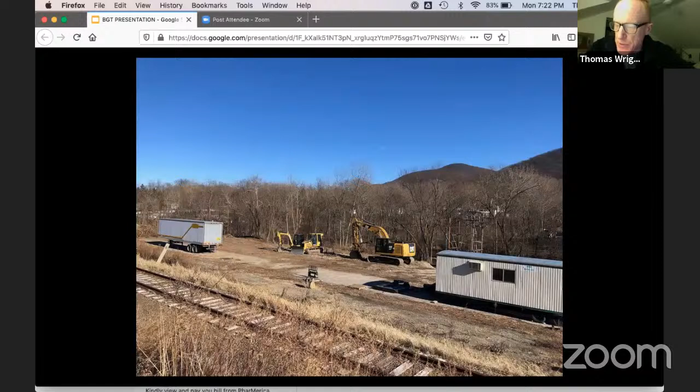This is an exciting time for trails in Beacon. As people flock to the Hudson Valley, more and more of them are discovering that Beacon's walkability extends to a large and increasingly interconnected network of trails - trails that expand our awareness of the natural beauty that surrounds us and connects us to communities around us. We are closer than ever to reap the rewards of planning and work that began over a decade ago, when we conceived of a continuous trail along the banks of Fishkill Creek from the train station to the Fishkill Town Line.

As an example, 2 key segments of the Fishkill Creek Greenway and Heritage Trail will soon emerge as part of the development underway at 248 Tioronda Avenue, and just across Wolcott Avenue at 2328 Creek Drive, the former DPW yard. In the action plan that the committee presented to the council in June 2020, we outlined the remaining challenges for the trail, as well as several other trail-related initiatives that we feel will greatly enhance the walking and hiking experience for Beacon citizens and its visitors.

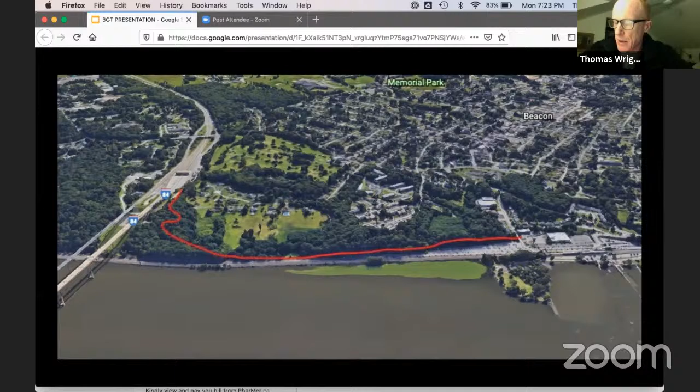One of these initiatives is the Beacon Hudson River Trail. For those of you who aren't familiar with it, the BHRT is a proposed trail that will one day link the pedestrian path of the Newburgh Beacon Bridge with the MTA Beacon train station. In addition to the practical benefits of a walking and biking link between Newburgh and Beacon, the trail passes through a very scenic wooded area and affords dramatic views of the river and the bridge overhead.

In 2014, the Beacon Greenway Trail Committee helped secure matching grant funds from the Hudson River Valley Greenway Conservancy to fund a master planning process led by Dan Biggs of Weston and Sampson, with insight and review from committee members.

That plan was presented to the City Council in March of 2017. In December of 2017, the city again successfully applied for a grant through the Conservancy to prepare preliminary design plans for a pathway and related structures for the trail. It is the result of these efforts that I'm presenting this evening.

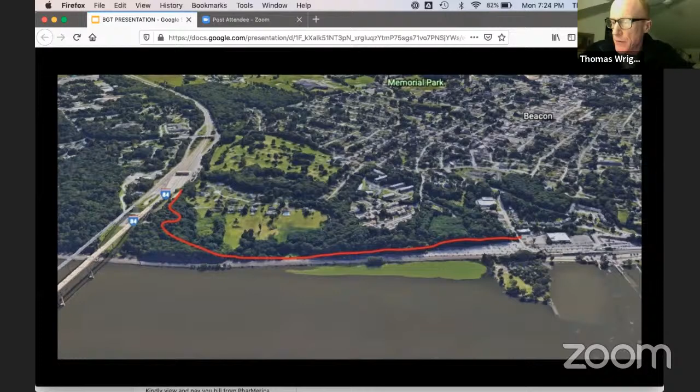The plan drawings and design report provide siting and layout for the trail as it winds its way down from the elevation of the bridge path to a scenic bluff overlooking the river, along the MTA rail line, to emerge at West Main Street, just a few steps from the Beacon train station.

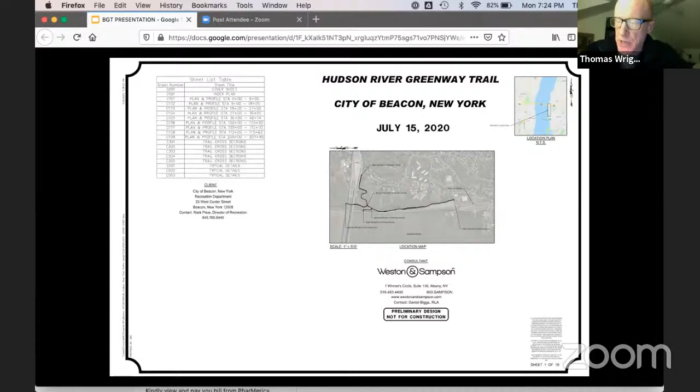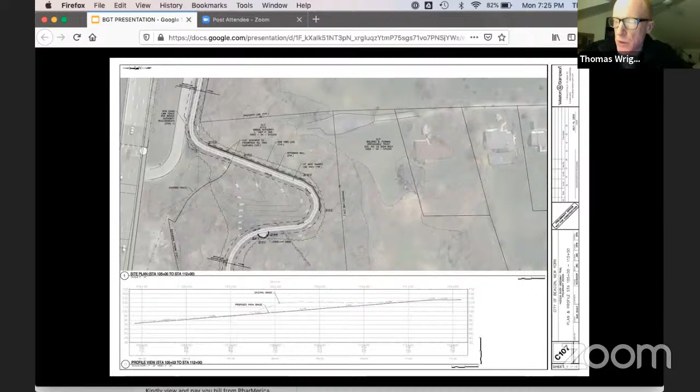Key aspects of the design are as follows. One, switchbacks and retaining walls required to navigate the drop in topography between the bridge and the bluff just above the rail line. Two, a future connection to residential communities in the town of Fishkill on the other side of the bridge. Permissions, cameras, and security fencing are required by the Bridge Authority, which are outlined in detail in the report.

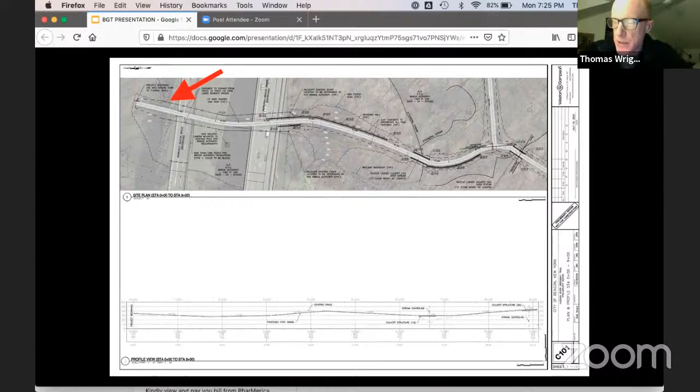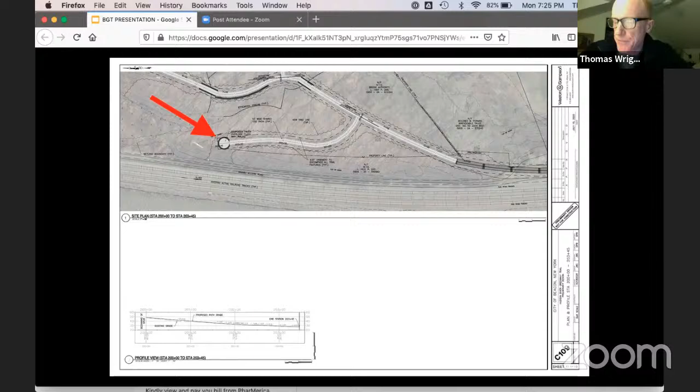Three, a viewing plaza at the bluff will provide a unique view of the Hudson bracketed by the dramatic bridge structure above. Four, an elevated portion of the trail, which navigates the rapid change in topography between the bluff and the MTA rail line.

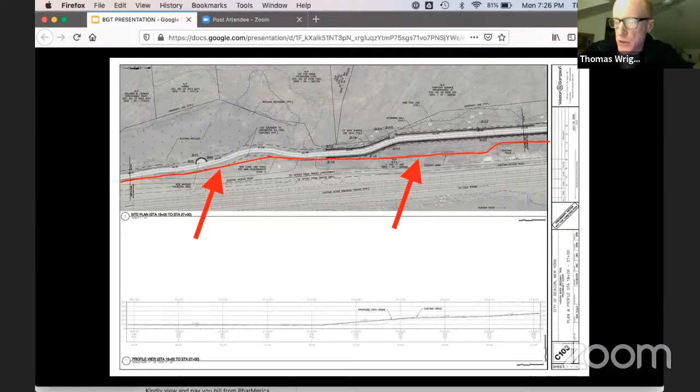Five, fencing locations and specifications as required by the MTA to keep trail users from Metro North train service. The design report and plans describe the proposed trail in a way that makes the project real. It analyzes the site, describes the challenges, and proposes solutions to these challenges. It provides enough information to generate a preliminary budget study, which Mr. Biggs has provided. The committee has reviewed and approved the final draft of the design report, which is available through the link in this evening's agenda, and we encourage the council to provide its approval as well.

In the spirit of keeping the momentum going, applying for another Greenway grant is a logical next step, and the committee encourages this. The design report notes on page 18 that, quote, upon approval of the preliminary design documents, the construction documents, including contract drawings and specifications, shall be prepared for bidding, end quote. However, given the costs and time frame associated with a project of this scale, the committee would like to propose a phased yet parallel effort.

Page 17 of the design report states, quote, as a first phase, it would be beneficial to establish an informal soft surface trail alignment, set up access easements and agreements with property owners, and therefore enable access for interested trail users, end quote. The committee feels that this initial phase can begin immediately, even as grant funds are sought for final construction documents.

An initial phase would focus on the portion of the trail between the pedestrian path at the bridge and the viewing plaza at the bluff along the rail line. This would leave the portion of the trail along the rail line inaccessible and off limits for the time being.

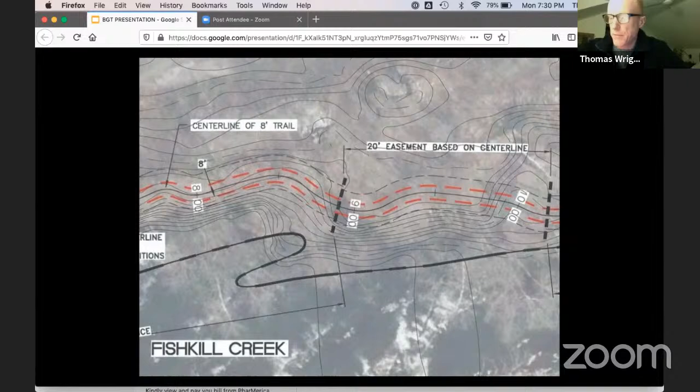The committee traced the desired route for the trail. Lanc & Tully used this as a template to place the 8-foot wide trail and 20-foot wide trail easement over the topo maps, and in the process also generated elevation diagrams that describe how much the trail rises and falls over a given distance.

In the north parcel, the trail is placed close to the top of the creek bank and extends from the trail currently under construction at 248 Tioronda to the Scenic Hudson parcel directly above Sucker Falls. The Scenic Hudson parcel separates north and south parcels of the Sisters property.

In it, we have proposed a fork allowing future trail users a choice between an ADA accessible route and a non-accessible route, which navigates the steep slope between the falls and the North Sisters parcel. The non-accessible route crosses over the old mill race and connects with the current northern terminus of Madam Brett Park, the viewing platform below the falls.

The accessible portion of the trail stays at the higher elevation and works its way across the MTA-owned parcel before switching back and joining Madam Brett Trail just north of the parking lot.

Hey Tom, back up one. I'm sorry? Back up one slide. I just want to be sure what everyone's seeing.

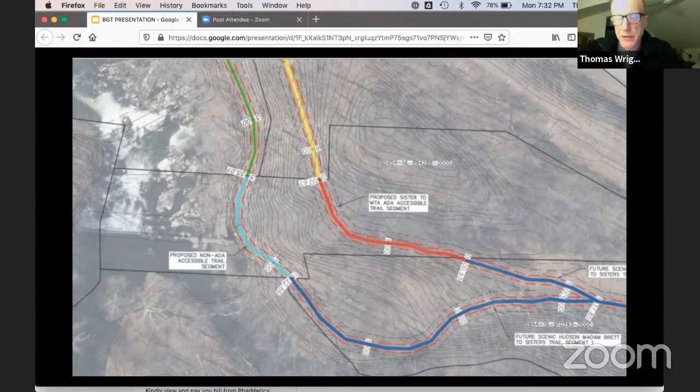The green is existing trail, and it goes on the blue line to the platform at Suckers Falls. That's the one on the left. And then you're saying that would continue near the creek and come around the bend. So currently the light blue—yep, the light blue is the area along the mill race as it goes alongside that dam. And the end of the green is basically the end of the viewing platform. And across the light blue, when it gets into dark blue, that's Scenic Hudson property. And that property links the light blue area of the southern parcel of the Sisters property to the northern parcel.

Okay, here's the northern parcel, which is the link between 248 Tioronda on the right and the Scenic Hudson property on the left.

A more detailed survey and design study would be required to determine the exact route for the accessible portion of the trail to ensure that it meets ADA standards.

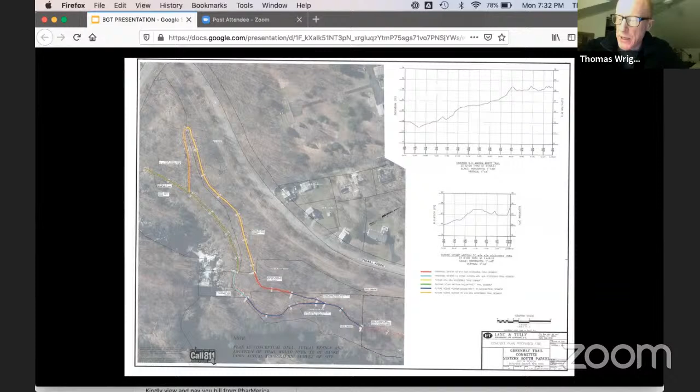Like the BHRT design report, the Sisters concept plan takes the ideas in the master plan and makes them real. Assuming the property is developed, the concept plan can be used as a guide for the developer in placing both trail and easement. The committee would encourage the council to approve the Sisters concept plan, but also to support a phased strategy similar to what we are proposing for the BHRT.

That is, approval for moving forward with securing easements through these parcels. This would allow for the implementation of an informal trail with the all-important public access for the trail. Further, with your approval, we propose to use the same strategy for the remaining segments of the Fishkill Creek Greenway and Heritage Trail. With your support, we would like to begin work on these segments immediately.

I would like to conclude by pointing out that the committee has achieved a lot for the city's trail network by taking the long view. The strategy of phased realization of trail access that I've outlined this evening is a way to expedite the process for both the BHRT and the Fishkill Creek Greenway and Heritage Trail. The committee requests that you consider this strategy and hopefully give it your blessing. Thank you very much, and I look forward to any questions that you might have.

Thomas, when you talk about the informal trails through the Sisters property, how does that get funded? Is it just like a goat path temporarily, or who pays for it, who maintains it?

Well, it could be, I mentioned, possibly using volunteer efforts. There are some organizations—Amy Kacala from our committee, who's the project manager for the Fjord Trail, is familiar with some organizations that go through and do just that. They establish informal sort of, kind of glorified goat paths.

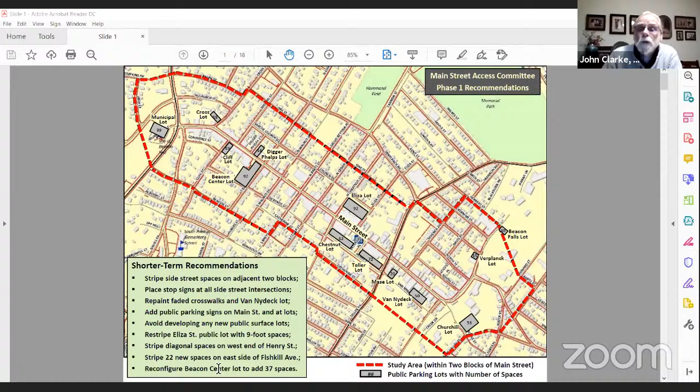So let's show some of those ideas. Here are the concepts for the public parking lot. There's sort of 2 sets, or 3 sets.

One is wayfinding signs, like this one up here on the left corner, that would be along Main Street at the intersection to get you to a public lot.

We proposed to name the lots, all the lots, primarily by the intersecting street. So you go up to Churchill Street and take a right, you'll get to the Churchill lot. That way, in theory, your GPS - if you remember the Churchill lot - and even we assume after a while, Google Maps and places like that will be able to direct you to those lots because they will have a name attached to them.

The second set of lot signs are at the lot entrance itself. They'll recognize it as a public parking lot, give you a name, and note any special postings about times or prohibitions or whatever.

And here's a whole bunch of examples. These are going to have to be determined based on each individual lot, but it gives you a nice, clean, recognizable public parking lot signage system.

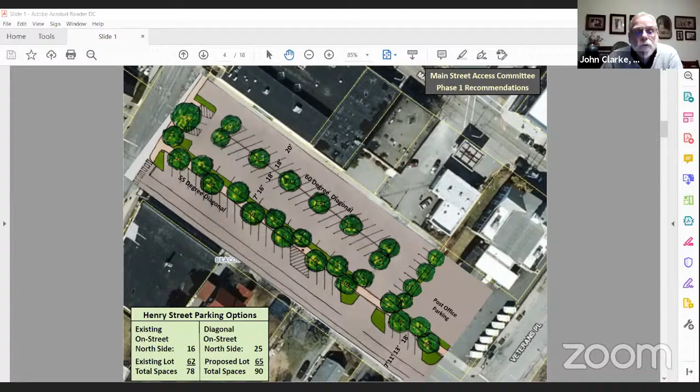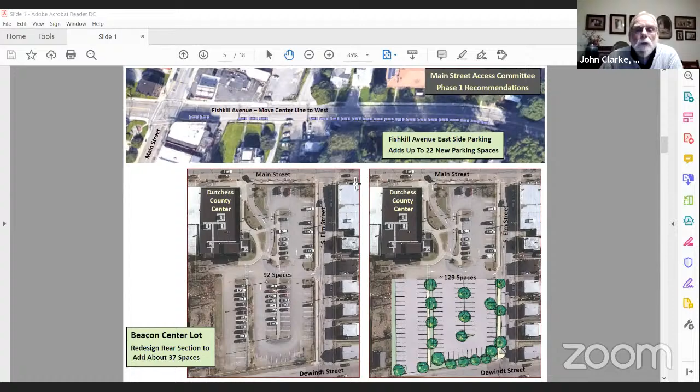On Fishkill Avenue, here shows 22 spaces up to where the curve starts. Because there's hardly any driveways along here, it's very efficient for getting cars parked along that street. All you have to do is move the center line and stripe the spaces, and get DOT to agree to it, which may be the hardest thing. The same thing on the west end of Main Street. Route 9D, which is another state highway, is really inefficient.

This is a sketch I did back in 2007 for this street. Just by changing the lane widths to something respectable, not oversized, you can get parking along the side next to West End Lofts, and you can get 25 spaces just on the first block. You could go another block if you wanted to. In addition, instead of having these two-way left turn lanes, which is just more asphalt, I'm proposing putting in street trees down the middle on a planted median, so you actually have something that looks like a boulevard at the entrance to your city rather than an arterial.

It's worth noting that new development is already completely overfull in the parking lots behind them. So that part of town is going to be short of parking, per unit, and they provided exactly that, so there's not a lot of visitor parking around there.

The city is also in the process, I understand, of acquiring this lot, which would be another 70 or so spaces if it was striped out to maximize the space there. So there's lots of opportunity to get spaces without doing a lot of work in the first phase.

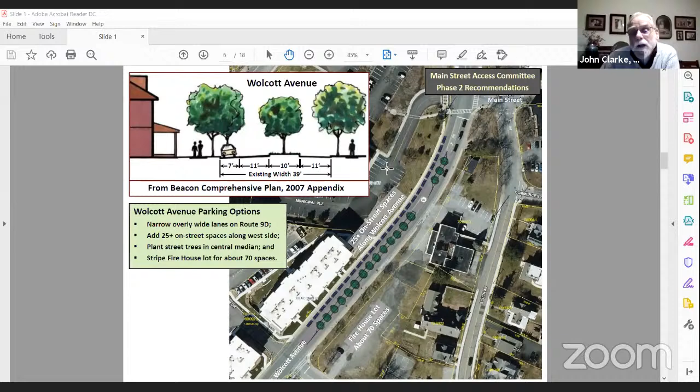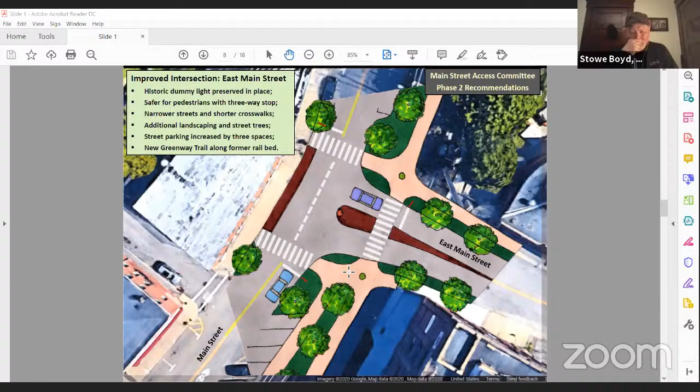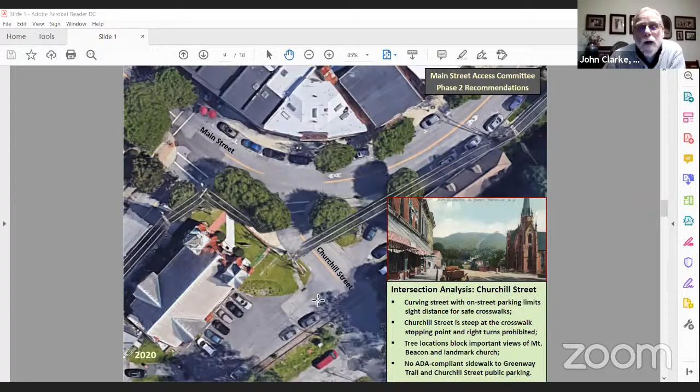I think it's safe to say this is the worst intersection in town right now. For example, at this part where you walk up the hill, there's a swale you have to walk through. It's not a sidewalk, it's not even a dirt path - it's this concave swale that on a rainy day is literally channeling water.

So it's ghastly. I'm going to suggest we stop with the short term, since you've about finished the near term - that's actually a decent stopping point. Consider that part one, okay? When you're done, we'll take questions, and then we'll pick up part two next time. Sure, okay.

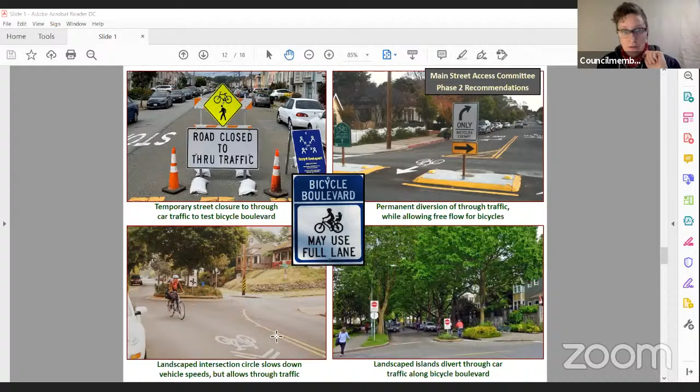Got a couple comments and questions, I'll try to be quick. Overall, fantastic, love it, love it, love it. On the Churchill Street intersection, John, would you mind pulling up the image? Yes, perfect.

The other thing is widening the sidewalks has a natural tendency to slow drivers down, even though they have exactly the same amount of surface street. They drive slower when the bump-outs are confronting them. It's both the slowness and the visibility. They just can't see what's coming around that corner, they wouldn't know there's a car pulled out at a weird angle, stopped as they're trying to badly park. So that would still be my encouragement, even with what you shared.

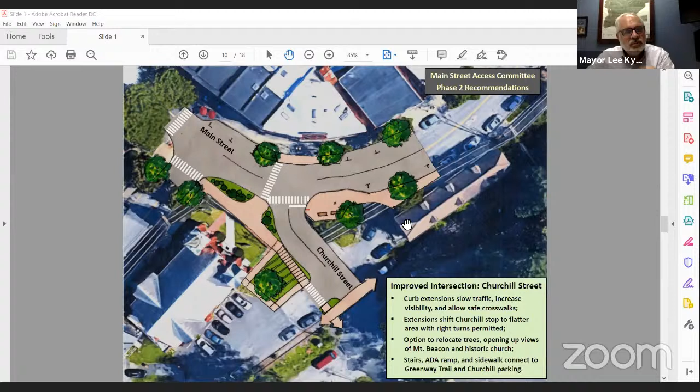So thank you, and again, I apologize for having to push people along, but this one will break into parts. The second phase will go through the rest of the document, take all our questions on the first phase including the bike lanes, and we'll figure out next steps. I'm thoroughly excited by this. There's a lot of stuff in tonight's agenda I'm very excited by, and this is certainly great work. I want to thank Sarah and John and the entire team.

There are a lot of things you can do that don't cost a lot of money that would make a big difference, like parking signs, striping, stop signs—those aren't major expenses. So thank you all. See you in a couple of weeks. All right, apologize, but that's how it works.

We've got 5 more items to go, and then personnel, and 2 items in executive session.

Traffic safety, can I just get Nick to give an overview of what the law says in terms of traffic safety? That can open up the discussion. I don't know if we'll finish that, but let's just start there.

Fair enough, Mayor. Section 65 of the city code references the creation of the Traffic Safety Committee. 65-2 talks about its composition, and 65-3 talks about the powers and duties.

We also have to look at other sections of the city code, specifically section 211-2, authority to install traffic control devices and the adoption of regulations, which empowers the city Traffic Safety Committee to make recommendations, and their approval is required before the city council can then adopt a local law controlling and putting in a new stop sign, for example, or a yield sign or something of that nature.

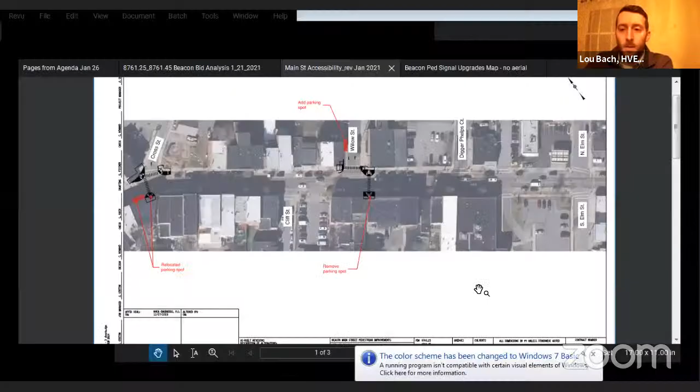So would someone like us to go through those, what the actual scope is? Real quick? Yes, please. Okay, I'm going to share my screen. All right, is that up? Everybody can see that? Yep.

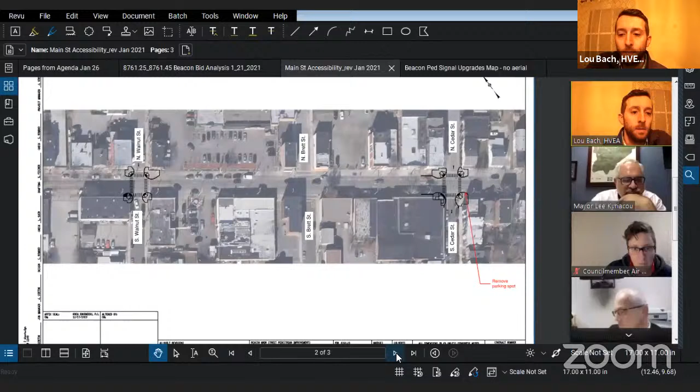All right, great. So as Mia said, we prioritized the intersections. Starting at Cross Street, moving up to Willow. Next page here, we included Walnut Street, Cedar Street. Chestnut Street is highlighted here because that's actually included in the other project, the pedestrian signals project. Then moving on to Eliza Street, and then at Veterans Place.

These intersections would include new curb, new ADA ramps, drainage improvements if needed, and crosswalks. I can go through each one if anybody has questions at a particular intersection — I can go into more detail if needed.

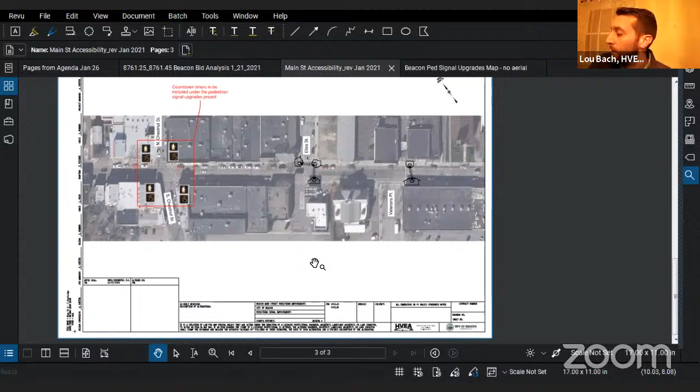Can you just remind us what the amount of the federal grant is? So doing that number of intersections is going to cost the federal government how much money? This is going to be including the pedestrian signals as well, because it's a full signal too. For the Main Street project, the total amount funded for construction was $799,000, and that's 80% covered by the federal government. So that breaks down to 639 from the feds and 160 from the city to cover their match.

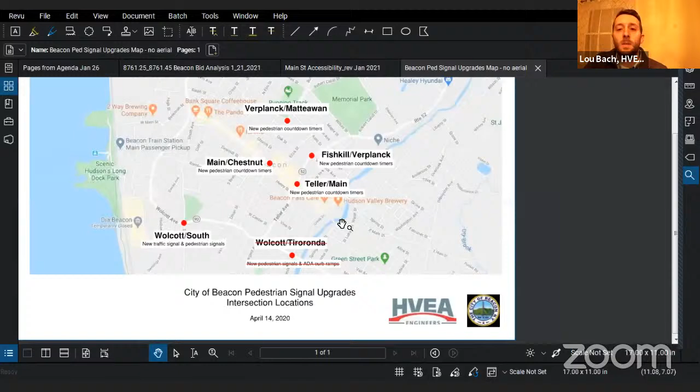Now go through the signal job, the locations first. Yeah, so here is what was originally 6 intersections. We took out a new signal at Wolcott and Tioronda. However, Wolcott and South is a whole new traffic signal with pedestrian signals. At the other intersections, it's limited to countdown timers and new push buttons.

It was discussed that the signal at Wolcott and Tioronda is fairly new and already has pedestrian accommodations, so that one was taken out. When we made choices, we got together and said Wolcott and Tioronda already works. Also, when looking at bump outs, we decided to do closer to every other block instead of every block, as a way of working it down. So I think we got the max value and matched up to the funding available.

We also maxed out the value because we took out some of the intersections that had more drainage impacts, which really drove up the price. So we're installing these at about 5 to 6 locations, and it's going to give everyone a taste of a safe crossing on Main Street, with a bump out, a shorter span to go across, and people see you when you're standing on the corner. Once people start using them, maybe then they'll clamor for more.

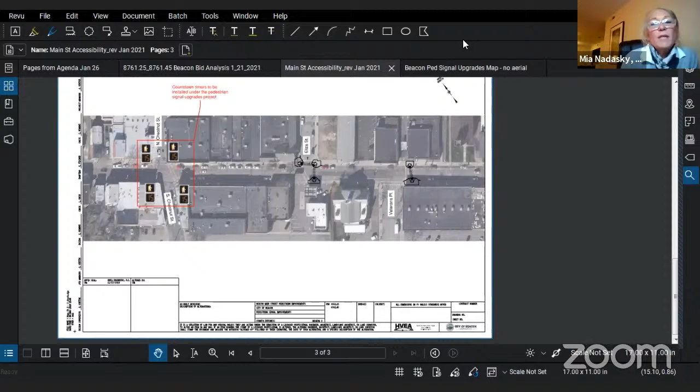Right now we're at approval to award and move forward. Since the contractor is already on board, he's looking to get the contract in place so he can do the shop drawing reviews and order the signal equipment, which has a heavier lead time.

We have all the approvals from New York State DOT to award the project. So basically we award, then you sign the contract, and once signed, the contractor can begin work. We're the consultant doing the construction inspection on the job, so we're also ready to start that process.

So construction would hopefully begin in the springtime? Yeah, I think SunUp is looking to start in the March-April timeframe. MPT is a big piece of this, to keep the street open while they're working and maintain access to the businesses.

That's part of our responsibility as the construction inspection firm, to ensure communication with businesses about where the work is happening and what access looks like, and at the end of the day make sure access is re-established.